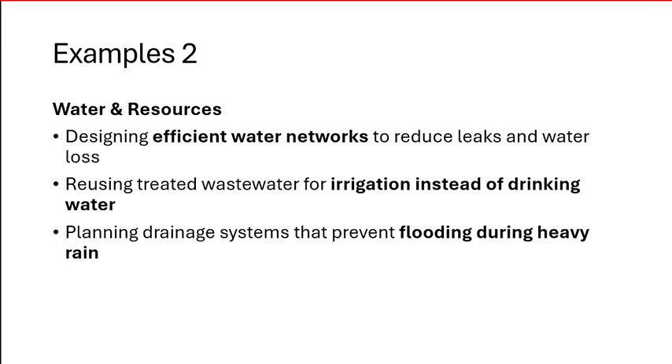We discussed what is sustainability earlier, basically making sure your design is safe and sound for today as well as for future. And we discussed some examples, and then we moved on to the pillars of sustainability: environmental, economic, and social. And we looked at some examples. Then we talked about environmental sustainability, where you are basically focusing on these three main factors.

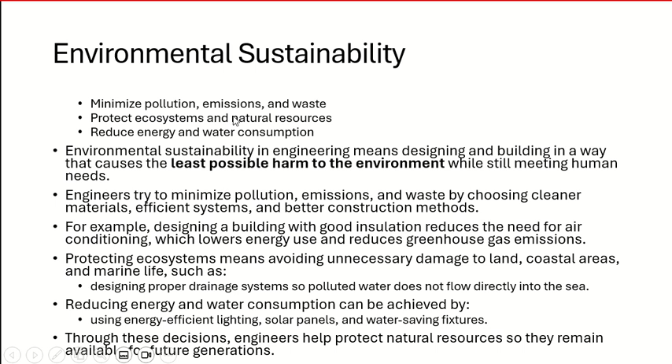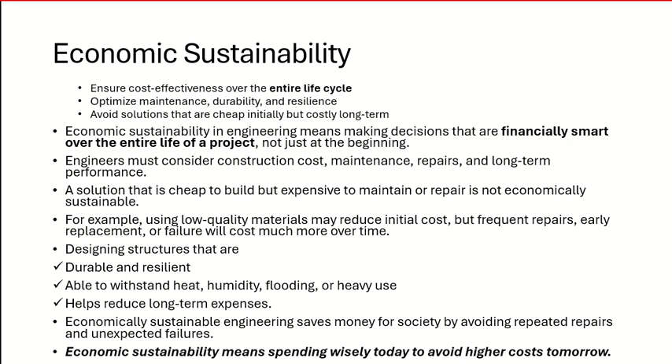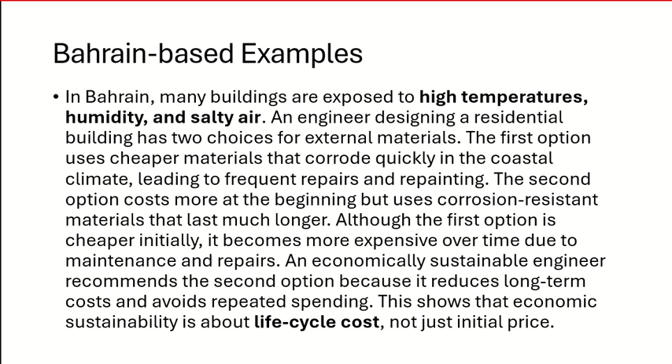And then the economic sustainability, okay, where basically you have to look for the life cycle. You have to make sure the project or product is durable and can last for longer time and will be cheaper during the life cycle. Okay. And life cycle means from design till the end of the use. So when the building is no longer usable, the road is no longer usable, that is the end of the life cycle.

Okay, now we move on to social sustainability. So we discussed environmental and economic. And did we discuss this? Okay, I think we didn't.

In social sustainability, the first thing is health and safety of the people. So you have to make sure that anything which you do will not cause any harm to the public. Okay, and that also includes the people who are working on the project. So if you are using any harmful material which is dangerous to handle, okay, obviously you cannot do that.

We talked earlier about disposing the waste. So if you are disposing the waste in a way that it will be creating problems for the residents in the area... so you did your construction, now the construction is finished, now you have some waste left on the site, so you have to dispose it in a proper way. Okay, you cannot just leave it, because that will cause problems to the people in that area.

So one more example I can give is the handling of the cement, or the mixing of the concrete or handling of the concrete. So with these materials, you need to be careful about handling them, because cement is basically made up of chemicals. So if people are handling them for longer periods of time with raw hands without any gloves or something, it can be harmful.

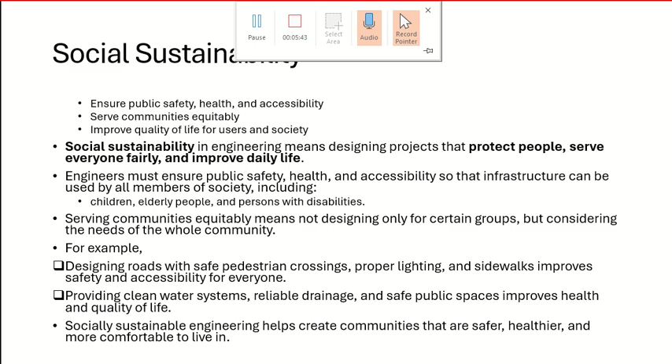So if you do not provide these alternatives, somebody in a wheelchair may not be able to access the building. So you are restricting their accessibility through your design. If somebody says, I don't have anybody to push my wheelchair, or I still have problems, that's another thing. But you are providing them means through your design. Okay.

Something again which is very connected to the concept of accessibility is serving communities equitably. Now, what does it mean? There are countries, Bahrain, alhamdulillah, we don't have this issue, or maybe I don't know. But in some other countries, for example, Pakistan or India, you will see settlements or housing areas which are completely different from each other. So you may have a housing area which is well managed, well established, you have everything proper, you have electricity, water, everything is available, and then you have other areas which are for low income communities.

In those communities, you will see the roads are broken, the electricity and water pipelines are not well maintained, so they are getting connected, disconnected. So this is what they mean here. So when you provide basic necessities, we are talking about basic necessities. We are not saying that every citizen must have a two-story villa and should be lavish and have all the facilities. No, we are talking about basic necessities and the things which come under infrastructure, the things which come under utilities.

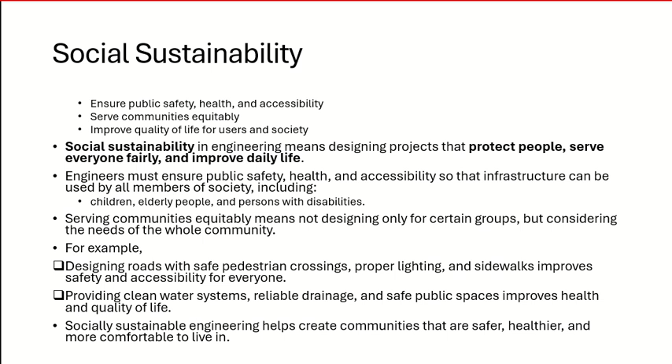So when engineers perform their social responsibility, then communities, meaning not a person but the entire area, the entire country, will also become safe, healthy, and comfortable. So through your design, you can change the entire country basically.

Okay, so some examples. I already gave the first example: providing clean water systems to all communities. It will protect their health and it will prevent diseases. In buildings you add ramps, elevators, and other access options so that people can access quite easily.

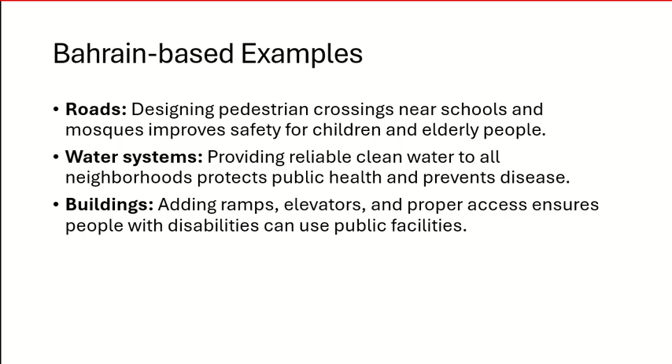So why are we talking about sustainability so much in the case of civil engineering? We have been talking about it for the last two lectures now. One of the main items is that in civil engineering, whatever we design has to be long lasting. It means that if I take a wrong decision now, people will suffer for a longer time, or you have to redo it. And you can imagine, if I'm designing something for 50 to 100 years and I have to do it multiple times, then the cost will be too much.

When you go for a building, when you go for a house, I believe more than 90% of people build one house in their whole lifetime, right? And there are many people who are not even involved in any other construction. So construction is a very costly business. Obviously governments do it because they are getting funds from different sources, but even for government, funds are not to be wasted.

You cannot say, okay, if somebody has a problem, I will do the redesign, we will demolish it, we will make another one here. No, it doesn't work like this. If you're doing it for a private client, he may not have funds to do it again. If you're doing it for government, they don't want to waste their funds.

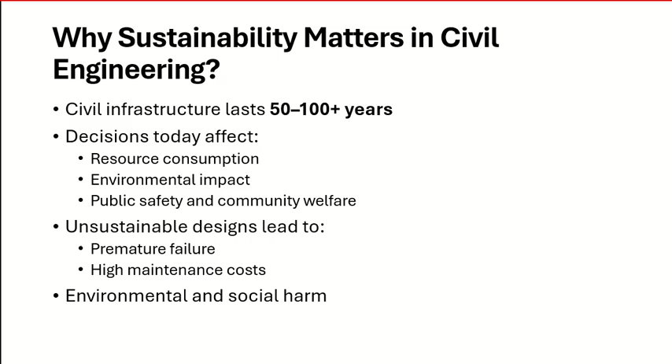And the company can say, okay, this phone is specially designed for blind people and so on and so forth. Okay, so others will not buy it. But the same thing is not true for roads and buildings and water pipelines and electricity pipelines. So you have to be more careful because your infrastructure is not restricted to a specific type of people.

Okay, so in summary, a sustainable civil engineering design has to be safe, it has to be economical, and the civil engineer needs to feel responsible for everybody, and not only for the present but also for future generations as well. And in the current scenario, sustainability is not an option. Sustainability, we have discussed many things. And there's one aspect on which I said you cannot negotiate.

Which aspect was that? Somebody remembers? I said you cannot negotiate on this aspect. We discussed it in the slides today, I believe the first slide. You don't have an option. Should I do this? Should I not do this? Which aspect was that? Yes, anyone? Which aspect of the design was non-negotiable? You don't have any option for it.

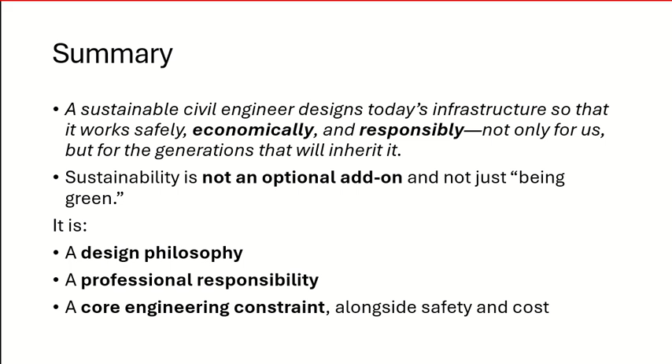I already gave you the example. You cannot do something which will be harmful for the environment. You cannot do something which will be harmful for the people, which will cause accidents and degrade the quality of life and so on and so forth. So sustainability tells you what you cannot do, basically. And as I said, you have to keep it in mind for the whole design.

This is a class activity. The main outcome of the activity is that you need to understand how engineering decisions are made. The activity is that you have a small public building in Bahrain. You have two options. You can choose between standard materials with high energy consumption, or energy efficient materials with better insulation.

So now, for each of the options, you identify two environmental impacts. It could be positive, it could be negative. So what I will do is I will open the discussion on Blackboard. Each one of you will go there. You will post three things.

Yes, two environmental impacts of the first option, two environmental impacts of the second option. As I said, it could be positive or negative, and you will give your decision in the end, which option is better, and you have to provide the reason. So each one of you will post two environmental impacts of the first option, two of the second option, and in the end your decision to choose which one.

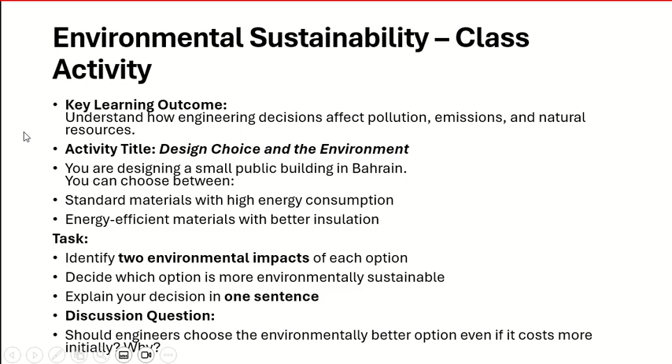Okay, so I'll open the discussion in the Blackboard, and each one of you will do it on their own. I'll move on. This is another one. So this is related to the life cycle cost, and we do not focus just on the construction cost. So activity: a road is being designed in Bahrain. We can go for a thin pavement with low initial cost, or a thicker pavement which has high initial cost but longer life.

Let us not do it on Blackboard. We will take more time. I'll just ask you on Teams; you can type on Teams. So I need you to give me first of all which option you will design, which option is more economically sustainable, and why. I'll make it simple. Just focus on one question: which option is more economically sustainable and why? Just do it over here.

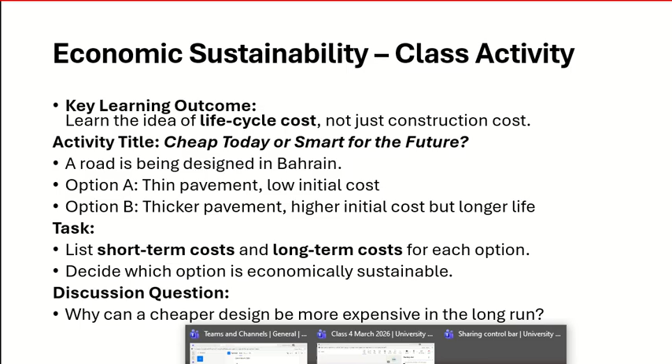Yes, I'll show you the options again. Option A is thin pavement, less initial cost. You have a thicker pavement, high initial cost, but longer life. Yes. Okay, good enough. So I believe it's better to do it here, but anyway, another one.

This is about public safety, equity, and quality of life. A new road is built without pedestrian crossings or facilities, so there are no sidewalks, there are no crossings. You have to answer. Now the question is slightly tricky, so I will write the question in Teams. A road is designed without pedestrian facilities. What benefits will we get from this design? Number one. And which people are getting harmed because of it?

Yes. You can later on look at the questions in the slides, answer them and show them to me. But for now, for the sake of the class, if a road is built without any pedestrian facilities, what benefits, like why did I do that in the first place? Now you have to look from the other aspect as well. If somebody is doing something which looks not sustainable, why would somebody do it? Why would somebody design a road which does not have any pedestrian facilities? What could be the reason? And when he did that design, he's harming which type of people?

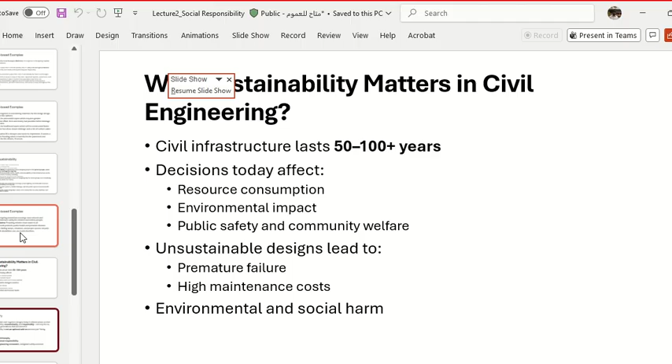Now this is a group task, so I will divide you into groups. I have 26 people. You are doing it online, so don't say boys separate and girls separate; I will just do it randomly. You will go into separate rooms on Teams, and you can discuss through messages. Each one will be in a separate call. And the thing you have to discuss is this one. If somebody can take a screenshot, maybe, or, can I put it here? Let me see. Here. So I will put it here.

So in your group you will pick a specific infrastructure project: road, building, water. For this project, you will indicate how environmental, economic, and social sustainability can be considered. I'm not looking for design, but what are the aspects? For example, for roads we talked about pedestrians and weather. So you just point out the aspects. In the group, discuss which type of project, and then discuss these aspects. I will divide you into groups. I'll move on; I want to finish this.

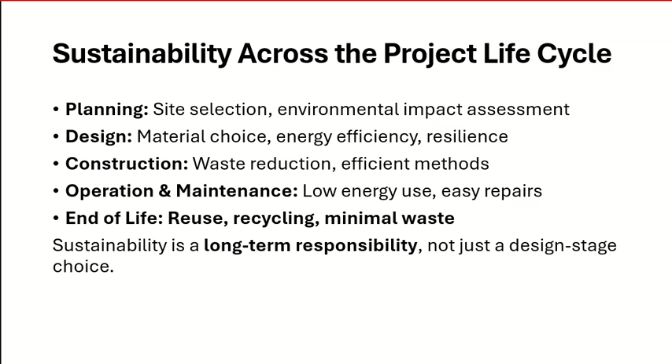So sustainability is a long-term responsibility. You have to think even about what will happen after the project ends. Sustainability has a connection with ethics as well. So it's an ethical responsibility, ethical obligation, not a technical choice, as we have said a couple of times. We will discuss ethics later on, but ethics is something which you have to do because of your personal duty. So there's a professional duty and there's a personal duty. Ethics is part of your personal duty. I have to do it as a human being, not just an engineer. So everybody has ethical responsibilities, but everybody doesn't have professional responsibilities.

So for example, labor on the site. The labor doesn't have a technical professional responsibility, but he still has ethical responsibility, ethical obligation. So he cannot leave his tools on the walkway, for example. That is unethical, right? And he cannot just throw garbage on the road. That is ethical obligation, ethical responsibility. So ethical is what you have to do personally, not as a professional, but as a human being. That's why we keep on saying sustainability is not a choice, because this is your ethical responsibility. I'm not doing it as part of my engineering. I'm doing it because I'm a human being. I have to take care of other human beings.